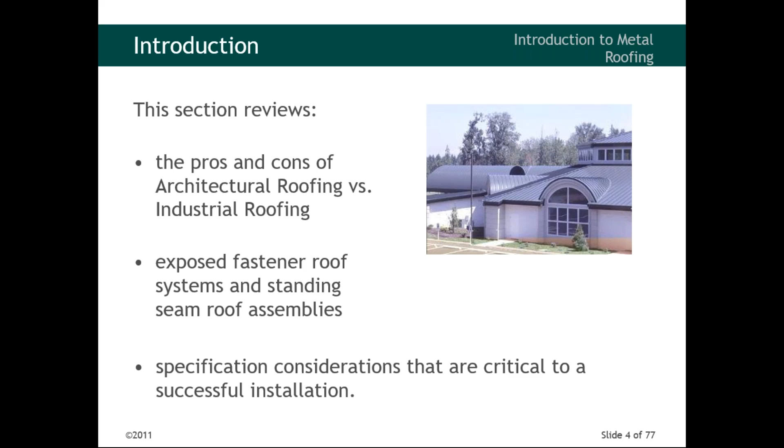Okay, this course is going to begin with a discussion of the pros and cons of architectural roofing versus industrial roofing. We're going to follow that with an overview of exposed fastener roof systems versus standing seam roof assemblies. Spec considerations that are critical to a successful installation will also be reviewed, such as proper substrate, underlayment material selection, metal gauge, coating, sealants, and so on. So let's start with the evaluation of the types of metal roofs.

Architectural systems. The 2 major applications for metal roofing are architectural and industrial. An architectural roof system is specified for performance, life cycle costs, as well as aesthetic reasons, and the roof is often part of the overall architectural design. Non-structural metal roofing usually requires a solid substrate beneath it, such as plywood, a metal roof deck, or rigid insulation over a solid substrate. A low-slope industrial roof system, on the other hand, is selected more for its function and performance, when cost is the major factor of the project, along with feasibility.

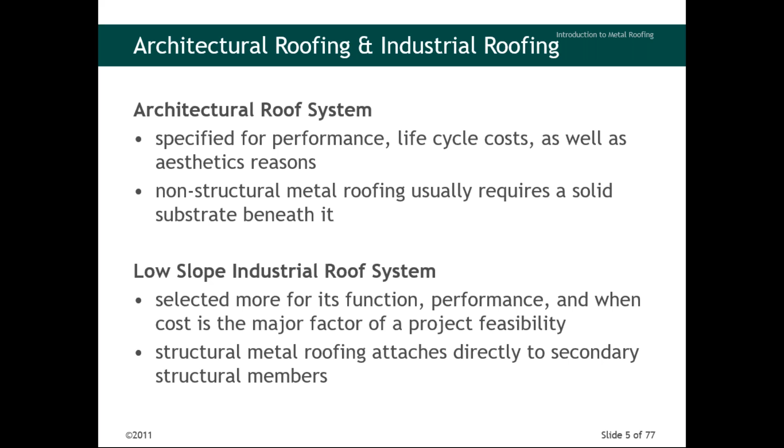Okay, exposed fastener roof systems. Exposed fastener panels, by definition, are number one, through fastened. They have fasteners that go through the metal. Number two, they're nestable. You can stack them one on top of another by moving the panel above to the left or to the right, and they can ship on pallets. And number three, they rely on laps and sealant for waterproofing.

Doesn't matter what the profile is. It can be a sine wave, trapezoid panel, a box, a diamond, a V, whatever you want. Corrugated is all of the above. Exposed fasteners, again, through fastened, nestable, and laps and sealant. These have been considered the standard in metal building for over 50 years. Exposed fastener systems, also known as through fastened, provide an economical performance value option.

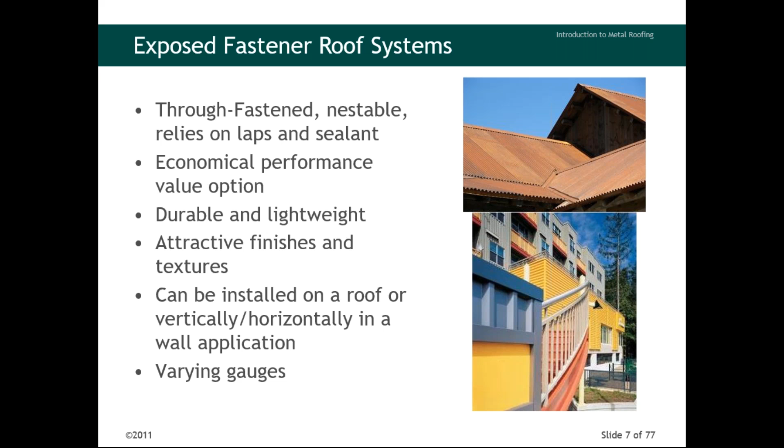They're durable, lightweight, available in any texture and color you can think of. They can be installed vertically, horizontally, used on roof, used on walls. These configurations can be fabbed in varying gauges that provide both high negative and positive load carrying capacities. Note that some types of these fastener profiles have been tested to provide diaphragm support.

So, along with the favorable attributes, exposed fastener roof systems have certain drawbacks. An exposed fastener panel relies on a visible fastening device for connection to the desired substrate and requires a field applied sealant to improve the weather tightness of the assembly. Also, these panels are pinned at every attachment point, thus not allowing for thermal cycling.

So I'm going to go off track on this a little bit. The good thing about corrugation is every single one of those corrugations acts as a tiny spring. If you take a piece of paper and you hold it flat on a piece of granite or a solid table, and you put your fingers at different points throughout either end and you push them together, that paper is going to flex at a different point every single time.

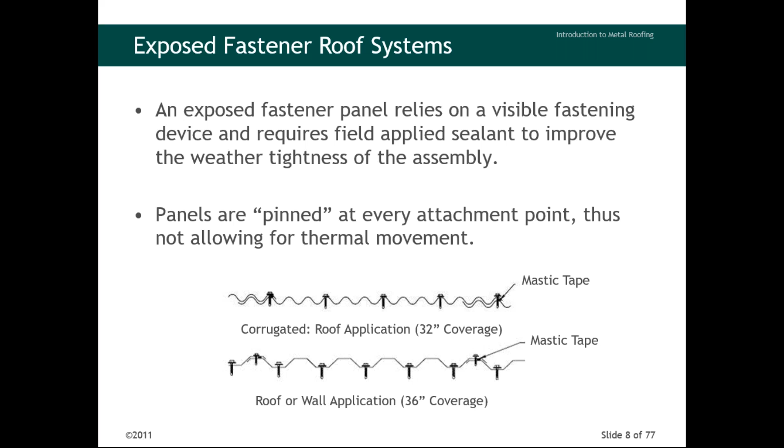Now, if you put a fold in that paper, it doesn't matter where you push on it, it's always going to flex on that fold. And that's what a corrugation is. It is a predefined point of flexation that helps to absorb that. Despite this, because they are through fastened, the top of the fastener head is going to catch a lot of the heat and it's going to transfer it down through, and over time you're going to get little holes or openings, which I believe takes us to this slide. There we go.

Over time, the expansion and contraction of the panels creates an elongated hole at the screw location. Again, it's a simple fix. Take out the existing and drive in the next size up: a 10, go to a 12, and so on. But just something to keep in mind. Typically, exposed fastener panels should only be used on shorter panel runs. Again, this is because of the thermal cycling. And they're not recommended for slopes less than 1 in 12.

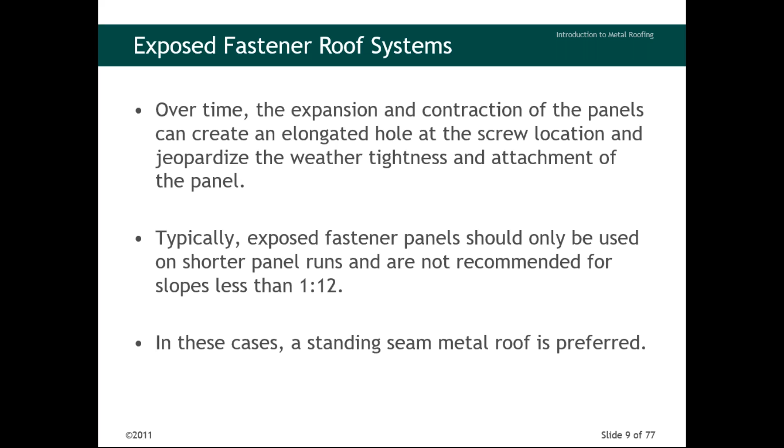If you're in certain states or you follow IBC, code requires that corrugated is only used down to a 1 in 12 slope over conditioned space when relying on laps and sealant. You have to have sealant in there. If there's no laps and sealant or there's no soldering, it's 3 in 12. So in these cases, a standing seam roof is preferred.

Okay, so what's a standing seam? Opposite of the through fastened, they are concealed fastener. So you may hear them called concealed fastener or standing seam, etc. They are also not nestable. If you have a 12-inch wide panel or a 16-inch wide panel, you can't fit another one inside. It's the same width. So these panels, when they ship, have to be flipped over upside down and stacked on top of one another with the flat sides facing opposite directions.

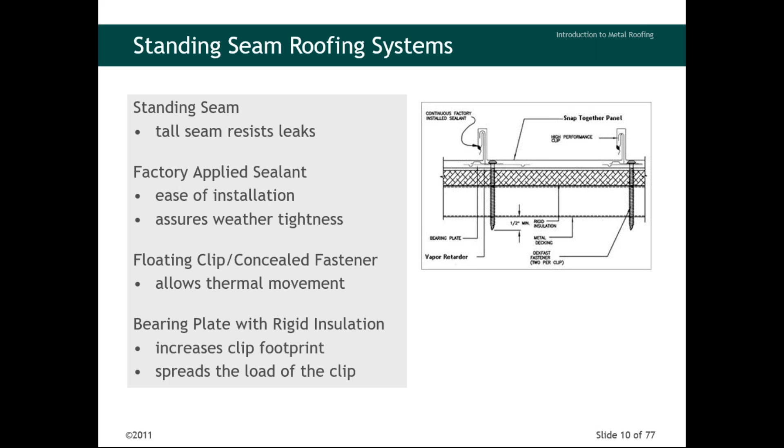Designed with a tall seam to resist leaks, standing seam offers performance coupled with aesthetics. The increased usage of metal panels on steep slope roofs is also coming into play, rather than just low slope roofs. But many architects prefer not to see the exposed screws attaching the panel to the substrate.

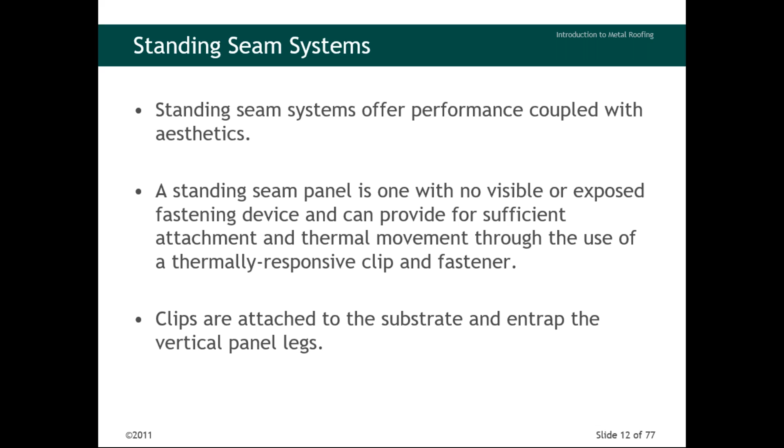So also, the standing seam panel is one where the fasteners are hidden, so they're not going to thermally cycle like exposed fastener panels will. The clip is attached to a substrate and entraps the vertical panel legs, and the concealed fastener eliminates the elongation of the fastener penetrations due to thermal movement, typically because the panel is moving within a clip.

There's one-piece and two-piece clips. One-piece clips are typically used with snap-together metal roofs in male-female configuration, and they entrap the steel leg, allowing unlimited thermal movement. Two-piece clips, however, are typically used with mechanically seamed roofs, except for a T-seam or a bulb seam.

With these, the actual clip is rolled into that panel leg, so floating clips are required with plus or minus 1 inch of thermal movement, which is going to limit the overall length. I'll get into that in a little bit, but keep in mind there's one-piece versus two-piece clips that can be utilized.

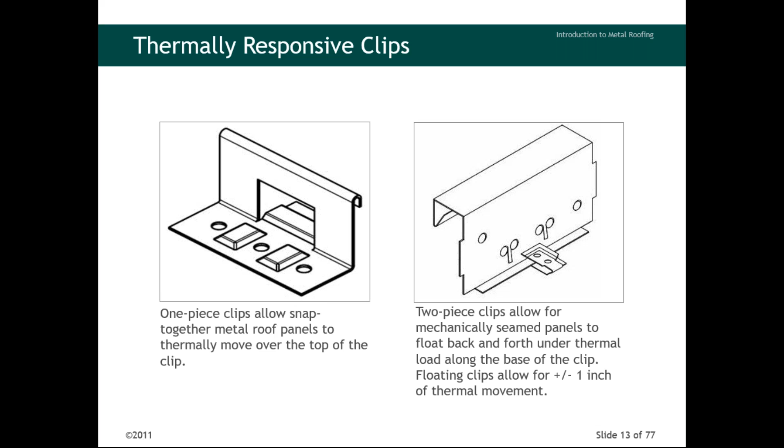So, bearing plates. Bearing plates are used when installing panels directly over rigid insulation to disperse the load of the clip from it compressing. Here's how you think about that: rigid insulation ain't so rigid, right?

If you're up there and you throw polyiso down, it has a compressive value of about 25 psi. That means if you step on it as a normal sized human being, you're going to put a dent in the ISO if you're not careful. So what do you need? Either an exterior board like a Densdeck Prime or USG Securock, or in lieu, you can use a bearing plate. In layman's terms, it's a big snowshoe, right?

The clip slides into that bearing plate, which is pre-perforated, and the fasteners run through both of them under tension. Instead of the clip's small footprint sinking into the insulation and the fasteners losing tension, the bearing plate distributes that load like a snowshoe, and you're good to go.

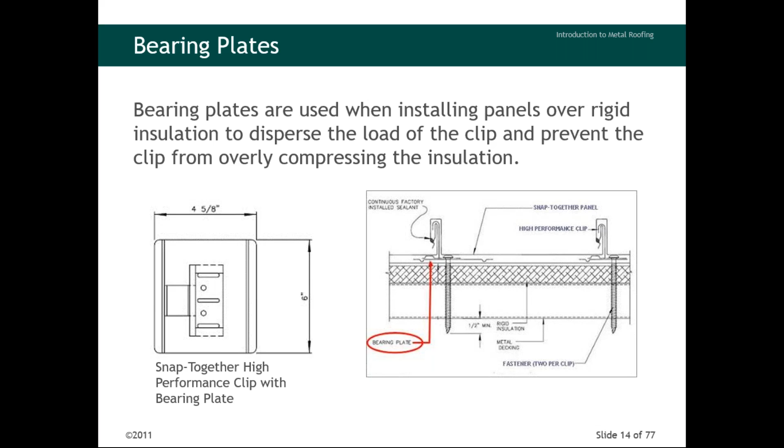Continuous standing seam panels can be used for long runs, low slopes, but it's important to be aware of the limitations. Continuous standing seam panels at extra long lengths perform no differently than a properly installed lapped panel. Extra long panels are prone to installation damage and present greater installation challenges.

So here's how I'd like to think about this. I know that everyone thinks a long length panel might be the best way to go because no laps means no holes, and it's going to be more strong and sturdy and waterproofed, right?

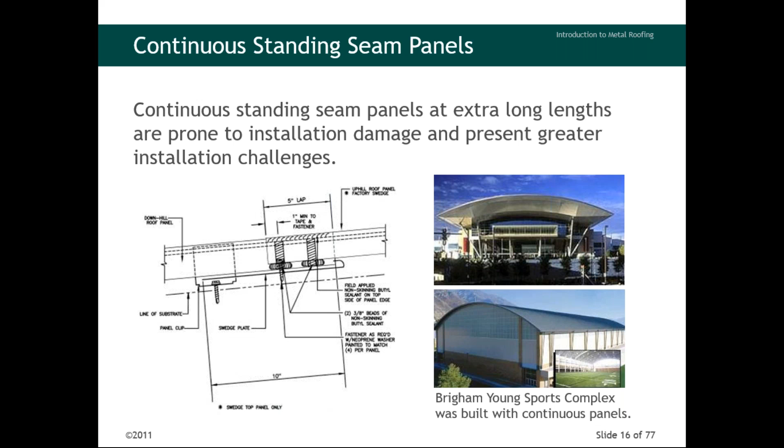Well, until you take into consideration the cost that entails. If continuous panels are required, you need to ensure you're using a quality supplier, because a lot of manufacturers don't offer mobile roll formers operated by factory techs instead of the contractor, which is going to invalidate your warranty, UL follow-up services, and machine certificates. So ask the metal manufacturer if that roll former is even certified.

The other thing to take into consideration is if you're going to use long length panels instead of a couple shorter ones, you're going to need certain things like crowd control, an on-site crane, and a spreader bar, which is incredibly expensive, plus one man or woman per 10-foot length of that panel.

So all of a sudden your crane rental and your spreader bar at 150 grand plus, paying 16 men or women to move a 150-foot long panel, might not be the best way to go when you can do three 50-foot lengths instead. Also make sure you don't twist the darn thing, which is why that spreader bar comes into play—because if you do, you're going to torque that panel and it's not going to be good, and the entire panel's wasted.

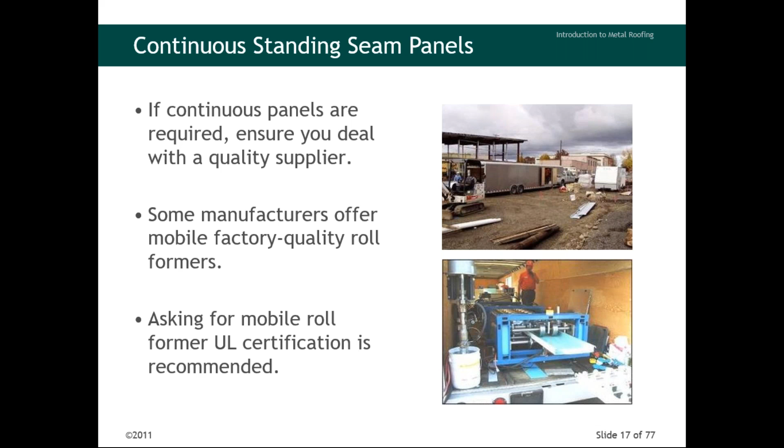So certain things to keep in mind there. Available in the market are also non-structural metal roofing panels, which are designed to shed water in sloped applications over solid substrates, as well as structural metal panels, which don't need them.

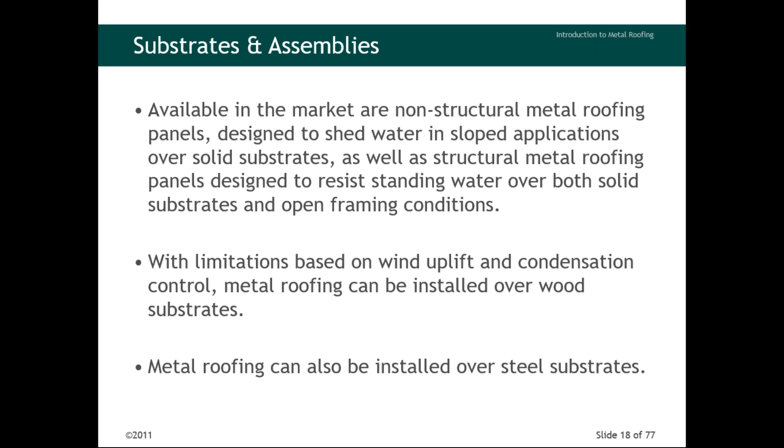With limitations based on wind uplift and condensation control, metal roofing can be installed over wood, such as solid decking, plywood, nail-based insulation, or SIPS panels. It can also be installed over steel substrates, including structural steel decking, both light gauge and structural secondary framing components, in both new construction and retrofits.

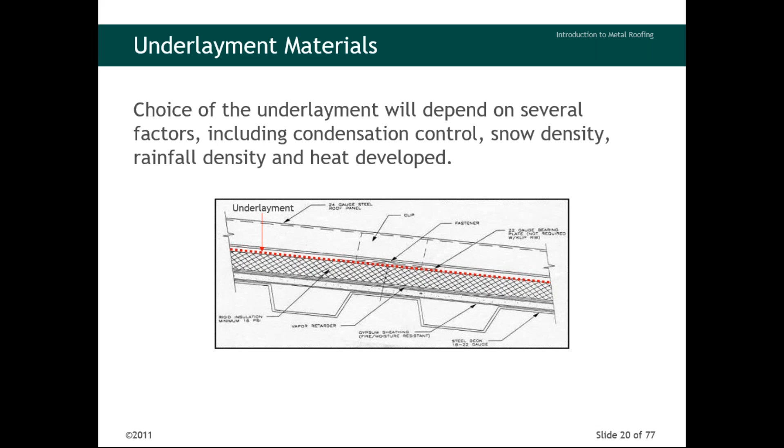Underlayment. You have a couple different options, including felt paper, synthetics, mod bits, and so on. Choice of underlayment is going to depend on a lot of factors. I do like using a 40 mil peel and stick modified that's also going to be high temp. The reason for high temp is under certain conditions, metal roofs can have extremely high temperatures under those metal panels, and asphalt impregnated paper can re-emulsify and leak down the sides of your building. So that's not a good look.

Vapor retarders, we can get into this. This is very, very specific. Generally designed to be installed on the warm side of the insulation or directly underneath the metal panel. Again, 40 mil peel and stick is my favorite way to go. If you have questions in regards to this, feel free to reach out to me for your site specific and project specific conditions.

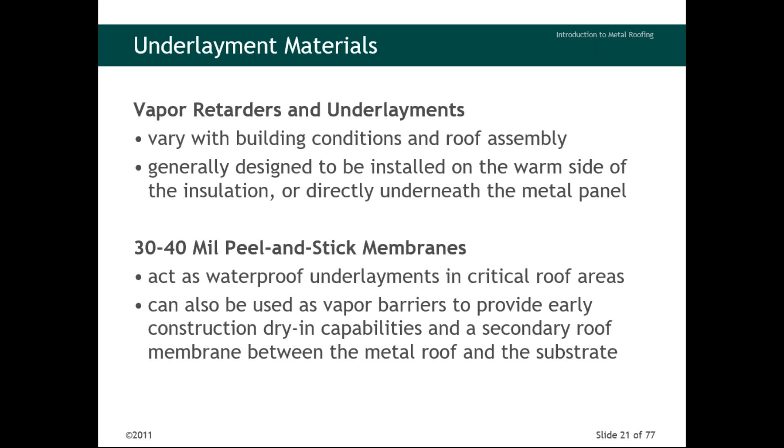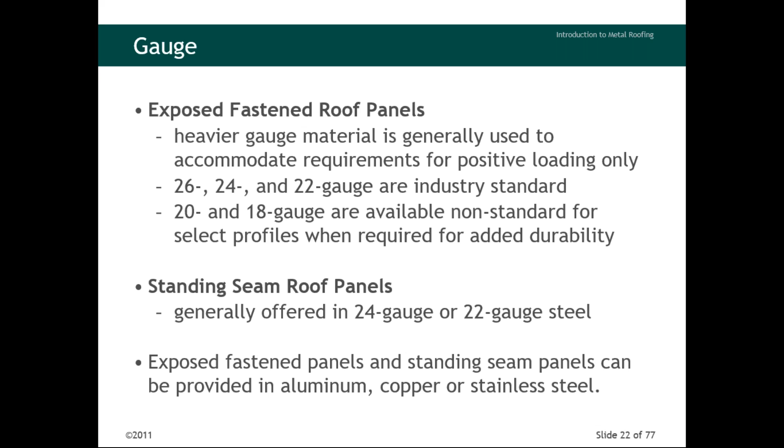On the other hand, standing seam is generally 22 or 24, and we can sometimes go to 20 for certain projects. Although test data is sometimes limited, both exposed fastener and standing seam can be provided in aluminum, copper, stainless, or whatever metal you need to meet the specific design conditions. But again, test data may be more limited.

Any questions so far? Thanks very much. Yeah, we do have a couple of questions, and a couple of people are asking about the limitations on slope for these various roof systems. In other words, how low can you go? I think, for batten seam, for standing seam, are there limitations?

What are they? Yes, so let's address that real quick. Let's first start with exposed fastener panels. Exposed fastener panels under IBC are limited to 3 and 12 without a sealant within the lap. They're limited to 1 and 12 over conditioned space with sealant in that lap. Anything below that is you're on your own, and that's typically used over non-conditioned space.

In terms of standing seam, the traditional batten style panels are, if you made an L with each of your thumbs and your pointer fingers and you held them on either side, that's what the panel looks like, right? It's just two 90-degree bends that have that batten seam. Those are typically limited to a 3/12 slope.

A male-female interlocking panel, snap lock style, is limited either, depending on manufacturer, to 1 and 12 slope or to 2 and 12 slope. Again, this is manufacturer dependent. A mechanically seamed panel is generally, again manufacturer dependent, limited to a 1/4 12 slope. Anything below 1/4 12 slope under IBC is required to be coal tar pitch. If you want to get involved with that, we can have a discussion after the fact, I've got info on it. But mechanically seamed, 1/4 12; snap lock, 1 and 12 or 2 and 12; batten style, 3 and 12.

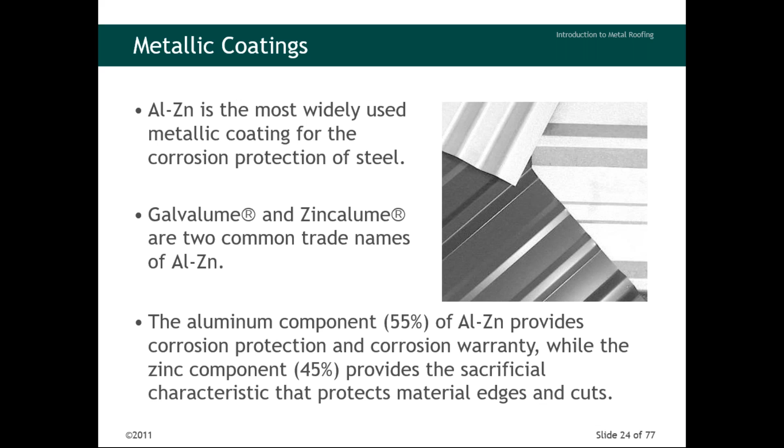So it's a 55-45 aluminum to zinc by weight, okay, by weight. Again, trade names, Galvalume, Zincalume. If you hear that, that's what it's after. The aluminum component of the Zincalume provides the corrosion protection to the steel sheet along with the corrosion warranty, while the zinc component provides the sacrificial characteristic that protects the material edges and cuts. So oftentimes when we're talking about bare metal, we're talking about aluminum zinc coated metal, okay?

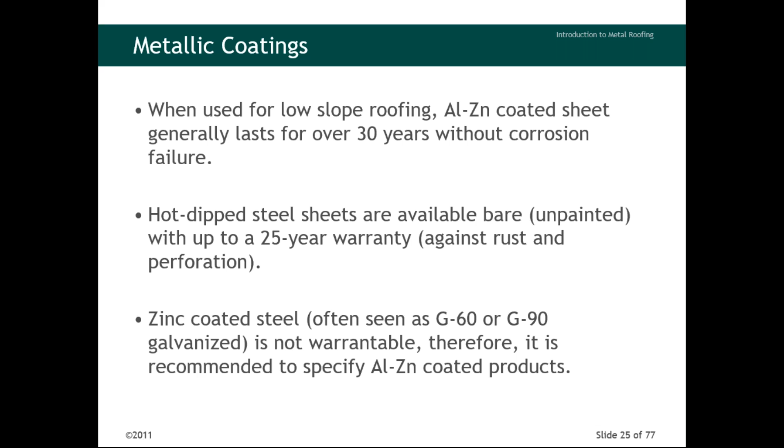So there's also zinc coated steel, which you often see as G90 or G60. Well, that's your galvanized, okay? Galvanized is not the same thing as Zincalume Galvalume. It's not warrantable, therefore don't run with it unless you have to, okay? Galvanized substrates are not warrantable. Zincalume is. Paint options for metal roofs, okay.

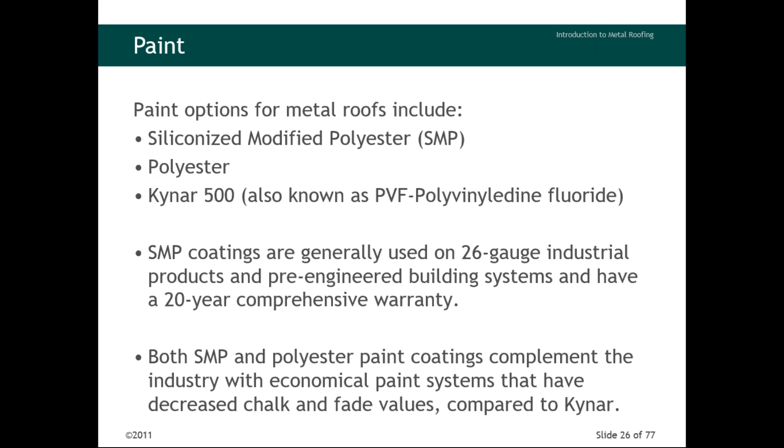Okay, so let's say you don't want those two. Let's go to Kynar. Kynar 500, Hylar 5000, I mean all the same thing, okay? Most widely used in the architectural market, it's a paint system containing a minimum 70% fluoropolymer or Kynar resin. Chalk and fade qualities outperform polyester powder, urethane, silicones, acrylics, hands down.

Kynar paints — this slide is actually out of date now — may be warranted for up to 40 years, not 30. So when you couple Kynar with a Zincalume Galvalume substrate, the product is going to have exceptional color stability, chalk resistance, durability, abrasion resistance, and a substrate warranty. So even for severe corrosive environments where you'd say, hey, I should use aluminum, well, maybe not. I'll get into the differences of steel and aluminum a little bit later.

But with steel, you can use an industry standard 1 mil Kynar based coating. You can do a high build primer or a top coat. So you can warranty a steel coated substrate with Zincalume Galvalume with a paint system over salt water for 20 years.

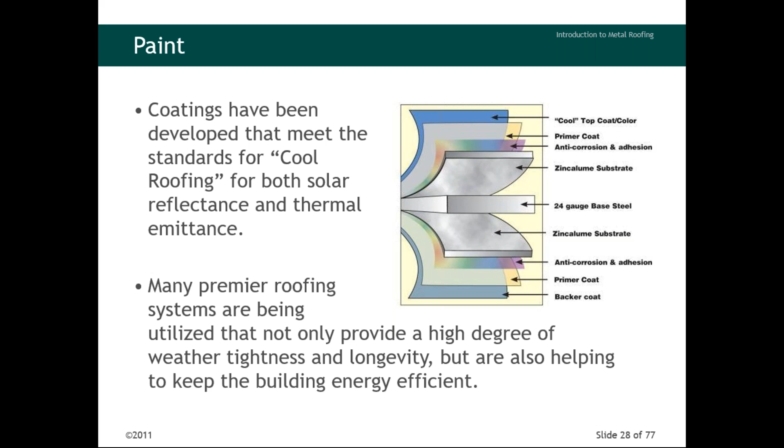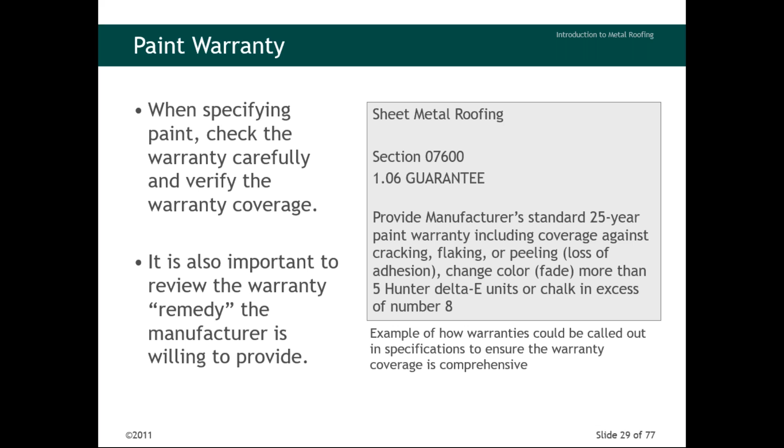Okay, I'm going to blow through these pretty quickly. If you have questions or concerns on warranties, reach out. There's way too much info here. No warranty is the same - they're very complex and convoluted. Make sure you check the warranty language though. It's critical to examine and compare not just the length of the warranty, but what it covers comprehensively: adhesion to the steel, color, fade, chalk, oxidation, what's the remedy, is there a reset clause, and all kinds of stuff. Reach out to me on that.

Sealants - here's the sealant question. Sealants protect against moisture intrusion on the roof at the exposed panel flashing edges or lap conditions. There's a couple different sealants used, okay?

Non-curing butyl is typically tube applied. This type of sealant should be used in any areas on a metal roof that are subject to dynamic movement of the panel, i.e. a lap, including panel side laps, end laps, flashing attachments, and any other metal-to-metal connection. Not only does non-curing sealant protect against capillary action, it allows the panels and flashings to react thermally, expand and contract without compromising the integrity of the sealant. It's not going to dry out, break down, or get decayed or destroyed, provided it's not exposed to sunlight.

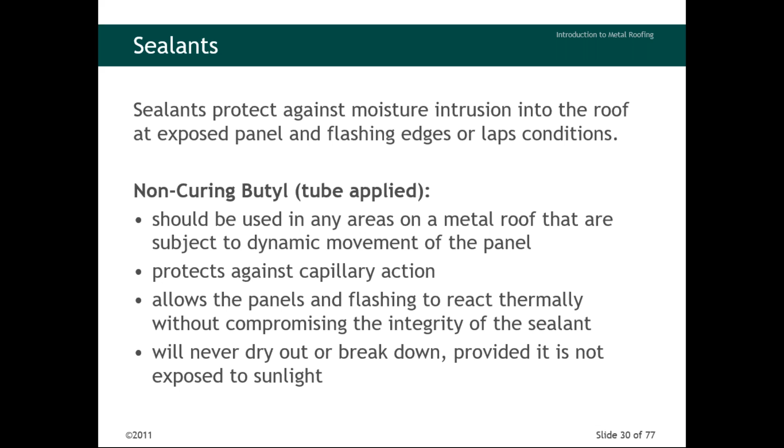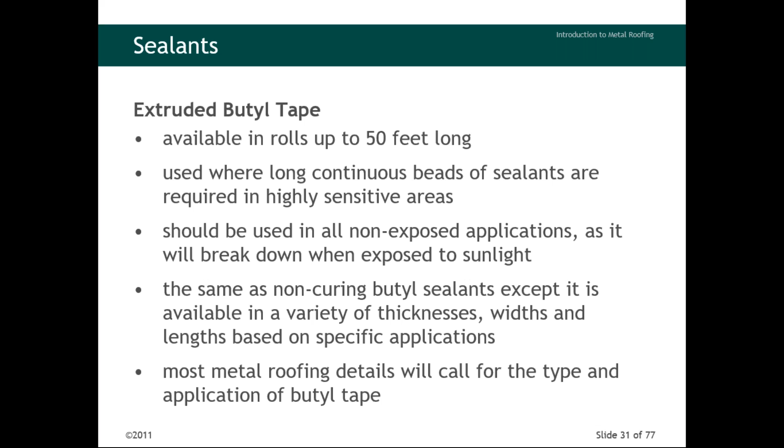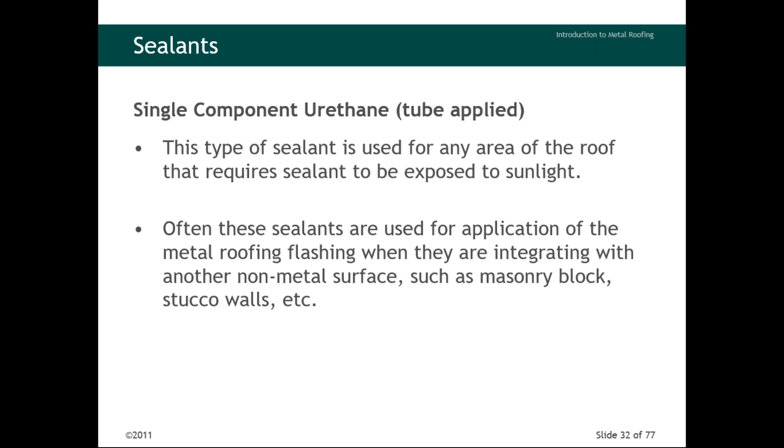Single component urethanes, tube applied, for any area of the roof that's exposed to sun. These are also used for metal connections to non-metal connections like masonry blocks, stucco walls, wood, and so on. They come in colors too.

Specifying for metal roof solutions. Let's review the specification considerations that help facilitate successful installation. Material quality and source - testing. As a quality manufacturer can provide test data, I'll throw that out there. Wind uplift, ASTM E1592, and air and water infiltration, 1680, 1646.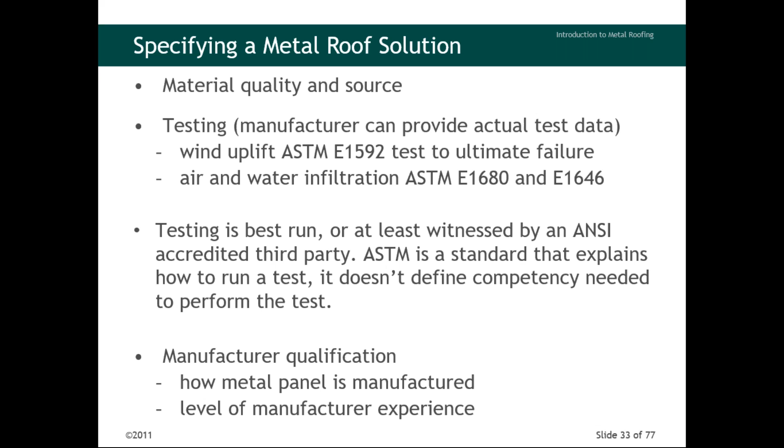Manufacturer qualifications - how's the metal manufactured, what's the level of their experience, are they certified? We can go down a rabbit hole with this, so if you have questions, in the interest of time, reach out to me later and I can walk you through it. There's also the installer side.

Make sure you have a qualified installer with a level of experience. They're manufacturer approved and trained, and they've done a certain amount of installations within a certain distance of where your project's located, and they can bond this type of project, because you don't want two guys in a truck that do painting one week, cabinets the next, to install your metal roof.

Okay, verify all the submittals. Again, we're going to cross over this quickly because it's pretty self-explanatory - the gauge, the testing, and so on, and then require stamped calcs for your project-specific conditions.

So, energy content - this also changes, but let's explore real quickly for metal roofing: solar panels, environmental impact, and so on. To that end, various software programs are available to use, such as ISO 14K environmental standards, Athena Eco Calculator, and so on. But it's important to compare not only the life cycle sustainability of a product, but also its full range of environmental and social impact in order to choose the best solution.

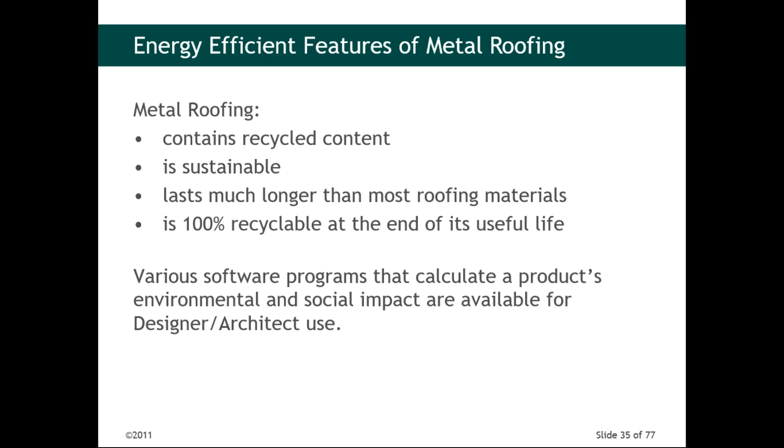Again, this is a rabbit hole we can go down, if you're following LEED, or if you want to go on the different petals and so on. I've got information on all of that - reach out to me if you're interested, from LEED to Living Building and so on.

Coatings - that can be an entire presentation on its own. Some coatings and finishes available today qualify as a quote-unquote cool roof product. What a cool roof product is: they have infrared pigments incorporated into the paint, so they put magical little sprinkles into the paint that give it a higher reflectivity value, even in darker colors. So where you see a cool dark bronze or a cool matte black, that's what it's referring to.

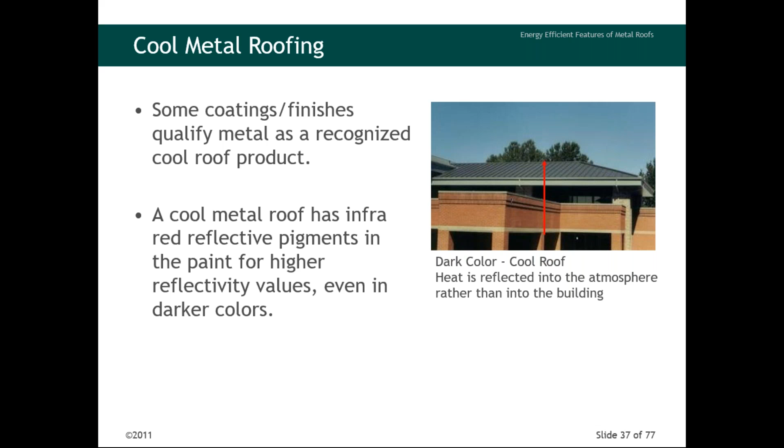For instance, a roof with normal pigments may have like a .07 reflective value, but improving it to a .32 with their pigments. So cool metal roofing has high solar reflectance values and emissivity values exceeding 80%. A cool metal roof will reflect the solar heat back into the atmosphere, lowering both the inside temps of the building and the surrounding environment, thereby reducing the heat island effect, also the intake temps of HVAC.

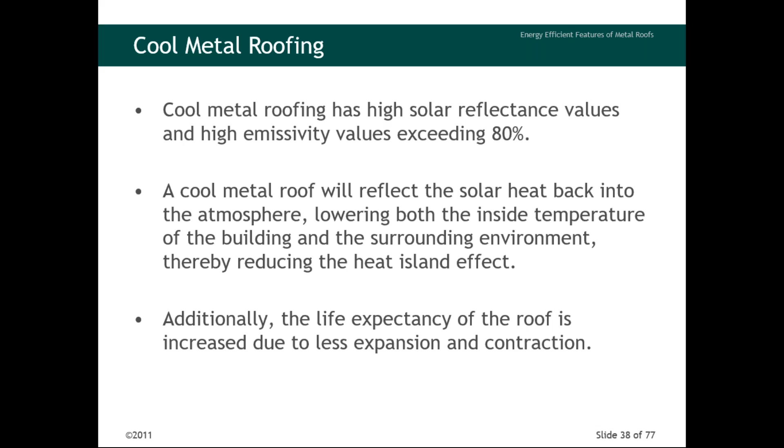Additionally, the life expectancy of the roof is increased with less thermal cycling. Here's a couple of colors and how to look at SRI and thermal emittance. Again, reach out if you need some help.

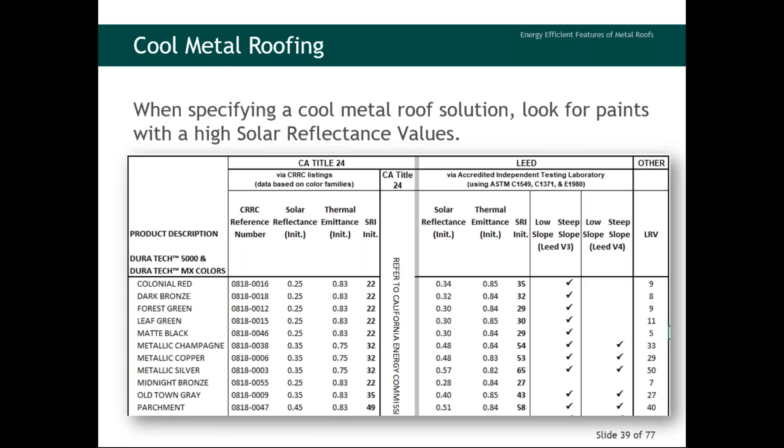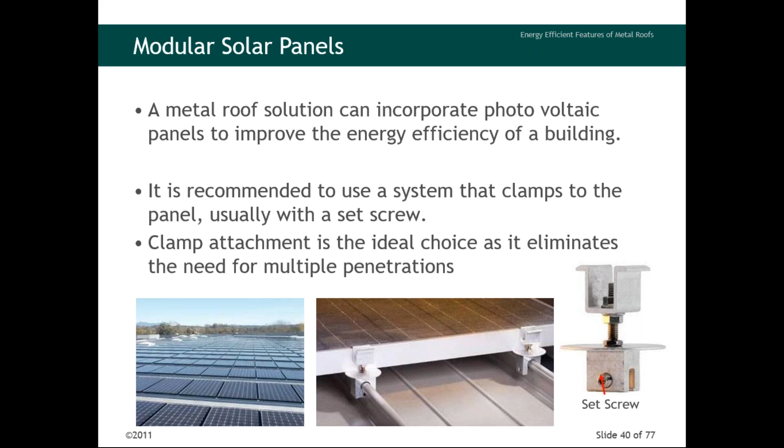Modular solar. A metal roof solution can incorporate PV, no problem. I prefer these manufacturers, though I can't mention names. Reach out to me if you want some help on this. Certain manufacturers make clamps that attach onto the standing seam without putting any holes in the roof. You tighten it down, then put the PV on top. So it looks like this: set those clamps in place, lay your subframe, and put the PV on top.

Self-explanatory: keep the dissimilar metals apart. Clamp-on systems won't void a warranty, but you should note that damage from them isn't covered by any manufacturer I know of. So follow the torque considerations very carefully.

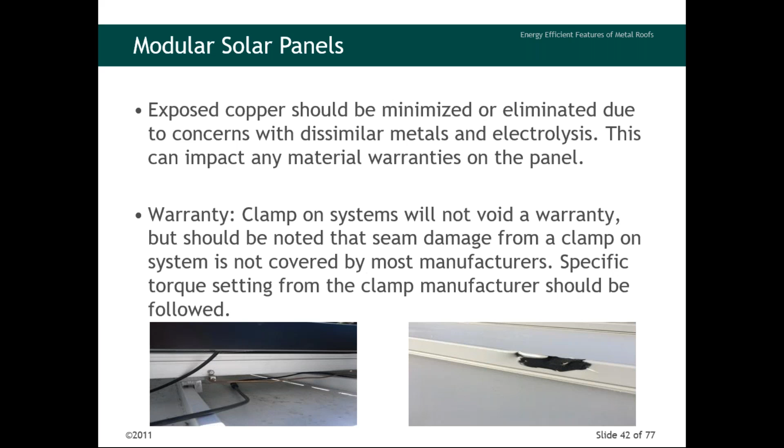And that's what it looks like there. We're at another spot. Hey, thanks, Jeffrey.

We've got a lot of questions here about fasteners and especially exposed fasteners, let me try to pull them all into one big question. Are there any particular screw materials for exposed fasteners, and are there issues with galvanic action around the screws, such as with other materials like wood or pressure treated wood? And are there any issues with a through fastener mitigating holes that could open up due to movement as a result of that?

Okay, so exposed fastener roofs, I have to be careful how I handle this one because it's going to vary widely from manufacturer to manufacturer. Whichever manufacturer you're specifying, I would follow their fastener recommendation to the T, because that's what all your IAPMO, ICC, and ER reports are going to come back with. All their testing and values are done with a specific fastener, so I would use that as my point of reference, and it could be different across the board.

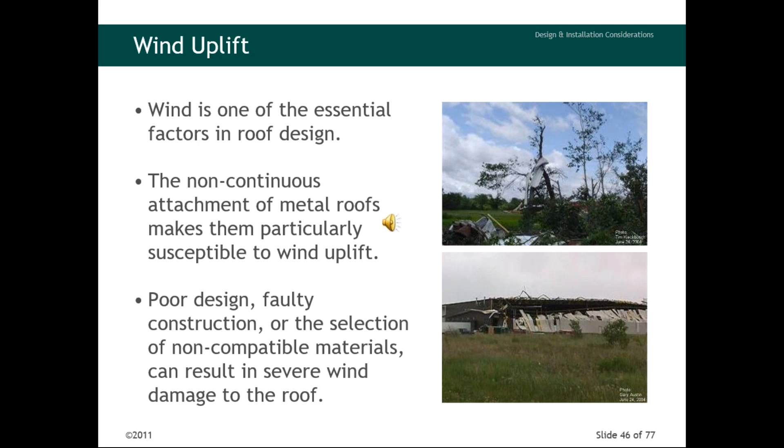Wind is one of the essential design factors in roof. The non-continuous attachment of metal roofs makes them particularly susceptible to wind uplift, defined as the upward force exerted by wind traveling across a roof, right? Bad things can happen if not done correctly. So listed on this slide are some key factors. In the interest of time, I'm going to move through them. I'm sure you're familiar with these. We can provide on-site calcs for these when you provide this information.

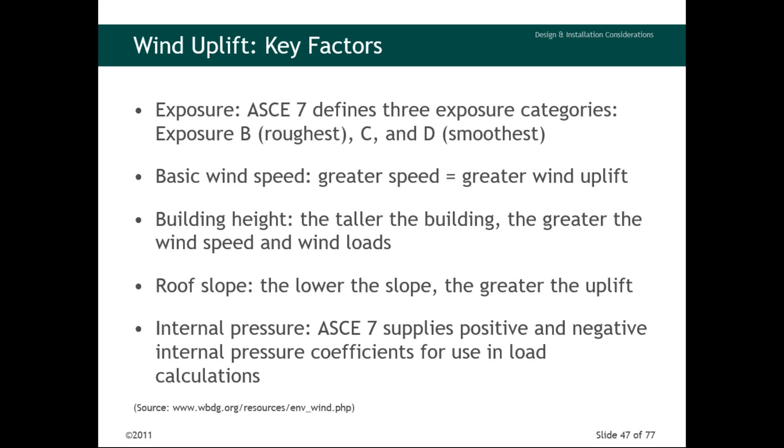Exposure, exposure B, C, D, so on. The smoother the terrain, the greater the wind load. Basic wind speed, building height, roof slope, internal pressure, they all come into play. Okay. Structural standing seam panels are tested under ASTM E1592. That is the standard test method for structural performance of sheet metal roof and siding systems by uniform static air pressure difference. I was getting it right though.

All standing seam metal roof panels should be tested under the UL 580 uplift test as well to meet minimum requirements in the industry. Additionally, the manufacturer should subscribe to the UL follow-up service because projects often require more stringent test results. Many standing seam panel manufacturers test their metal panels with other agencies other than UL, such as ASTM and FM. Okay, got to pay attention to this one. Ready?

UL is pass-fail. Okay, did you pass? Did you fail? ASTM and FM testing takes that panel to failure. All right. So just because you got a 71% and your pass fail rate was a 70 doesn't mean it's the best panel around. ASTM, you know, takes that to failure. So maybe your grade was a 71 on that test and you passed, but you aren't that kid that got the 98, right?

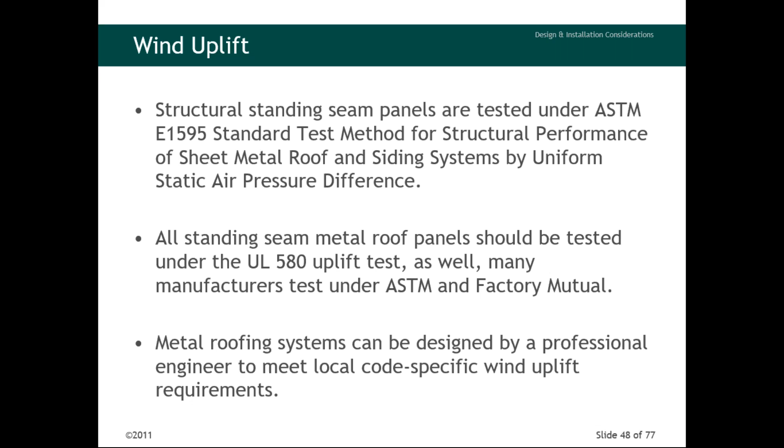So taking it to a failure point provides important data to develop accurate negative pressure information useful for determining the panel performance and clip spacing. That's where your ER reports come in. Your ICC and your IAPMO and so on, right? So pay attention to that.

All right, air and water infiltration. In addition to wind, test for air and water infiltration. That's your ASTM E1680 for air and your 1646 for water. With proper sealant placement, exposed fastener panels can also provide adequate air and water infiltration control. And in addition, the standing seam roof panels that require mechanical seaming in the field and also require a panel-to-panel end lap due to a long

length. Remember my example of 3 50-footers with 6 people and no crane, no control, and not having to monitor wind conditions for wind that might spin a 150-foot long panel versus a long length panel. Again, there's pros and cons to both. Maybe you want a whole length, but maybe you don't.

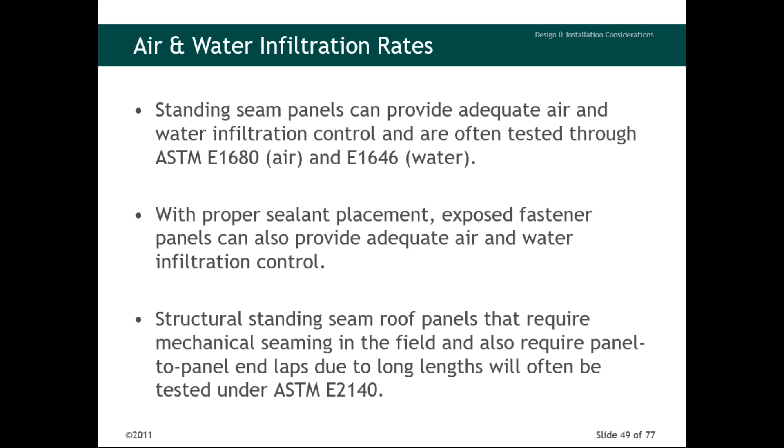The panel end lap test is tested under the ASTM 2140 as well. So that's where the panel-to-panel end lap is flooded with 6 inches of water, standing water, and then it has to hold for a period of 6 hours under pressure with no signs of leakage. So these tests are quite comprehensive. We're going to blow through this pretty quick.

Again, keep in mind that UL reports do not hold the same value as ASTM. UL doesn't push to failure, it's pass-fail, while ASTM does push to failure. And the ASTM tests are generally what's put in the ER, independent third parties, compared to UL. So in terms of FM as well, talk to me offline. If you want an FM roof, you should have FM requirements in the insurance. Okay.

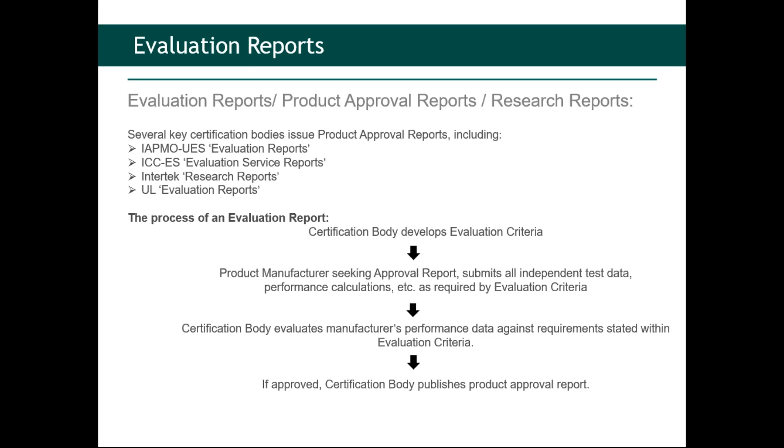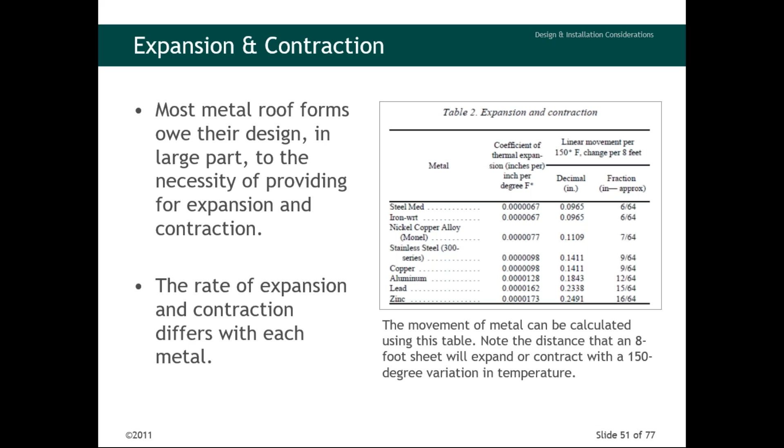This is what some of these reports look like. Thermal expansion and contraction with changes in temperature have to be taken into account as well. The buckling of sheets, tearing at the seams, loosening or pulling through the fasteners are common failures. So the rate of expansion and contraction is going to differ with each metal, per the table to the right. I believe this one's actually out of order. It should have been after this. Anyway, different metals move different ways, right?

Okay, evaluation reports and approval reports look like this. It's going to give you a table to extrapolate everything out. You're going to have your gauge at the top. So if you look at the one on the right, you're going to say outward negative uniform load capacities of 22 and 24 gauge of whatever product. You're going to go over to your left under the substrate. You're going to find what you're going into.

Are you going into metal? Are you going into wood or whatever, right? And then you go one to the right. What gauge of metal are you going into? And then you take your site-specific wind load requirements and you cross-reference that with the table, and you get what spacing you need.

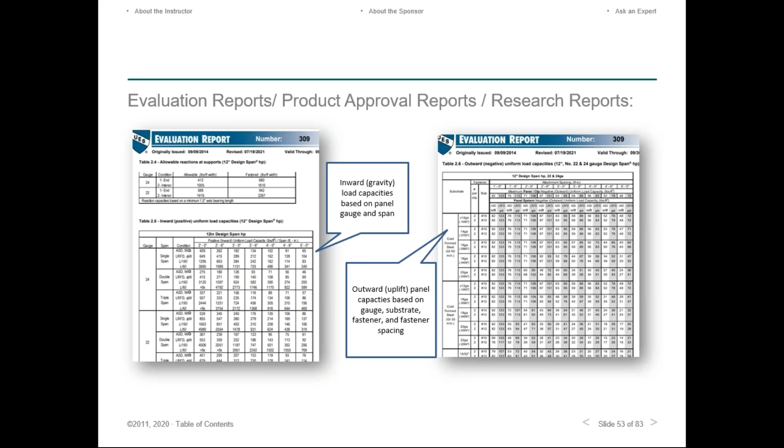All right, details. There are 3 ways to accommodate for thermal movement: 1 at the low end of the panel, 2 at the high end, or 3, both. Low, high, or both. Typically, panels are pinned at the high end or upslope of the panel. To accommodate movement at the low end of the panel, the high end is pinned and fastened, and the low end is a floating eave, right? It can then expand and contract downslope.

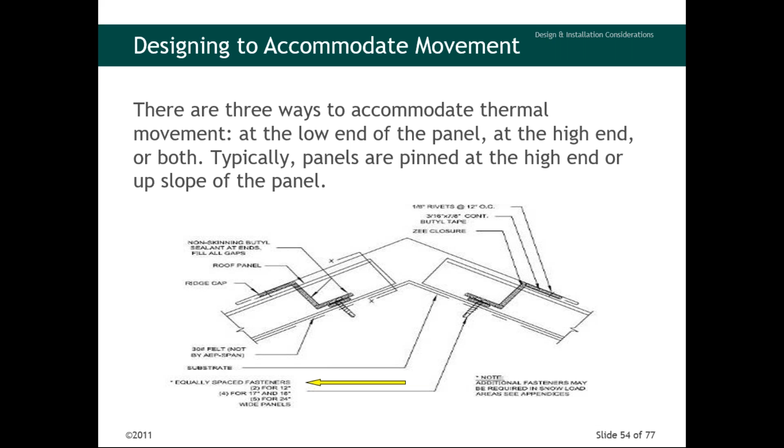To accommodate movement at the high end of the panel, the low end is pinned at the structure, so conversely, and the high end floats to accommodate the thermal movement. This method requires exposed fasteners at the low end of the panel. They may be of aesthetic concern.

The third method is to allow expansion and contraction at both the high and the low ends of the panel. This requires pinning somewhere in the middle of the panel for drag load, usually at a lap. This is generally done on long panel runs, i.e. where you have 70 foot plus in either direction, upslope and downslope, for 140, 150 foot long panels plus. This is done where the expansion and contraction is so great that it makes it difficult to allow for it to adjust at just one end, which reminds me why I put that slide there actually.

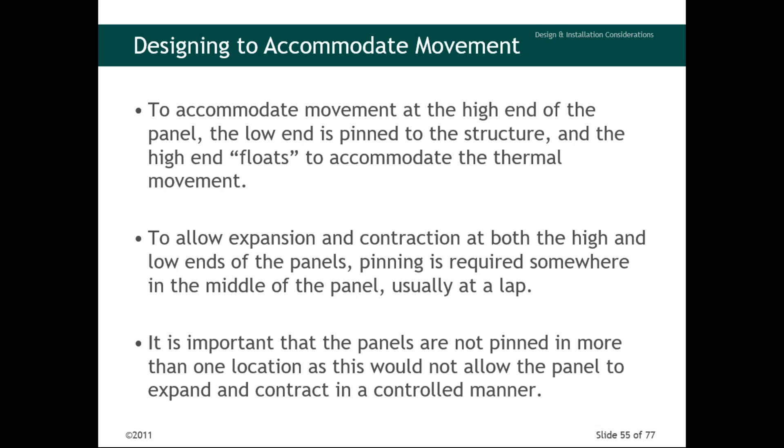So steel's going to move around 1/8 of an inch over a 10-foot stick, where aluminum's going to move 1/4 of an inch over a 10-foot stick. So when you have these long panel runs, your panels may be moving inches each day, right, as they thermally cycle. So that's where that movement in that clip of plus or minus 1 inch is going to come in on that 2-piece clip. So they can expand downslope 1 inch and upslope 1 inch, and you can hit those long lengths.

So an example here, you have a roof. I don't care if it's a shed roof or it's got a ridge, right? Going to pin it up top. It's going to expand downslope at 75 feet. But wait, Jeff, I've got a huge shed and I need 150 foot length. I don't want to pay for a spreader bar. I don't want to pay for on-site roll forming because the truck can't bring in 150 foot panels.

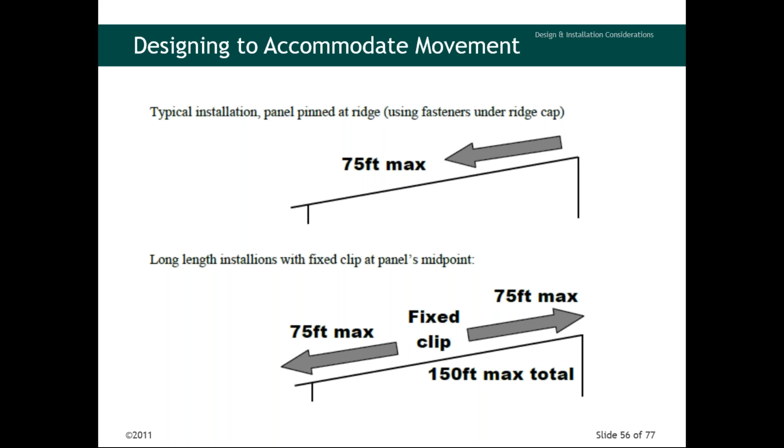I don't want to pay for 1 guy per 10-foot stick. I don't want to have crowd control and a forklift on site and all the other stuff. And I don't want to have the worries of the panel twisting while I'm loading onto the roof. So I'm going to do 2 75-foot long panels. Okay, you put a fixed clip in the middle. One panel expands upslope, one panel expands downslope, because again, metal has to move.

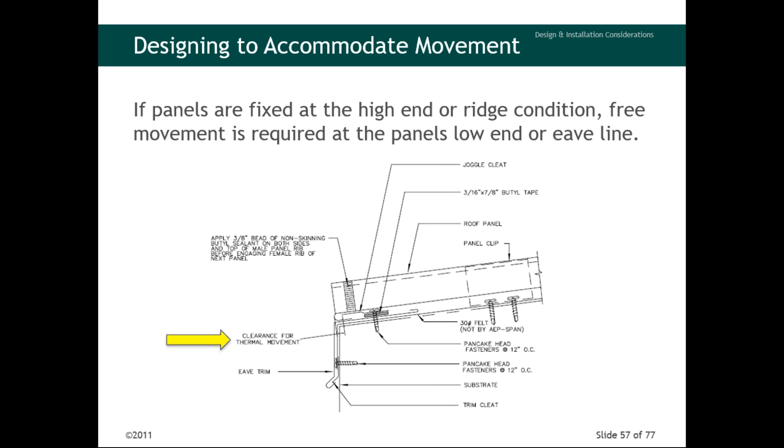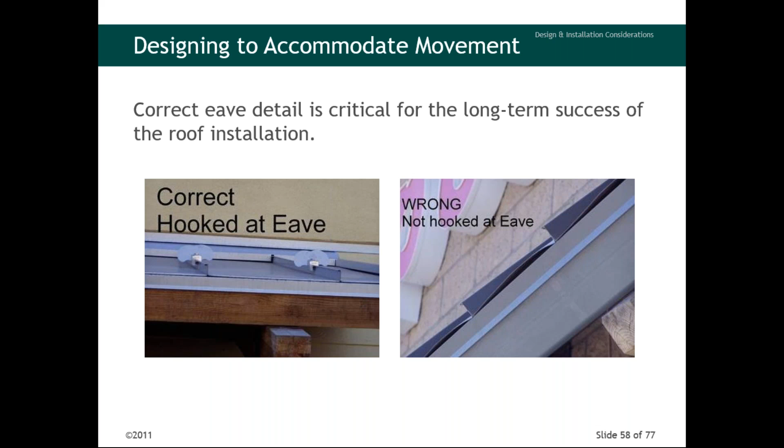If panels are fixed at the high end or the ridge condition, free movement is required at the bottom. There's your joggle cleat for a floating eave. Pictured here are examples of a proper and improper eave detail. The correct detail is critical for long-term success of that roofing installation.

Okay, a knee joint. Say you want to be modern and you want to turn a panel from a roof down a wall, right? Not a problem. However, it creates a point of fixation. So when you turn that panel and you cut the ribs to turn it down, 90 or 45, whatever you're doing, that creates a point of fixation. By definition, the panel now has to expand upslope. It's pinned at the eave.

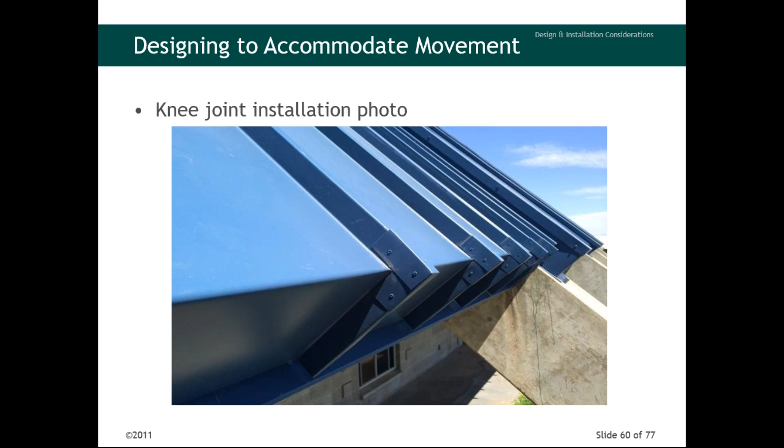There's your knee joints or your kneecaps. This is what covers the vertical panel rib of a standing seam roofing panel that transitions onto the fascia.

What's this one for? Oh, don't use it in snow. Okay, reach out to me if you want to use it in snowy climates. The freeze-thaw effect can pop these things wide open. Snow shear can shear them straight off. So you have to be aware of how much thermal movement is going to occur.

How far down the wall does this panel go? Number one, and where are you located? Number two is going to come into play. But this is an image of a failed kneecap in snow country.

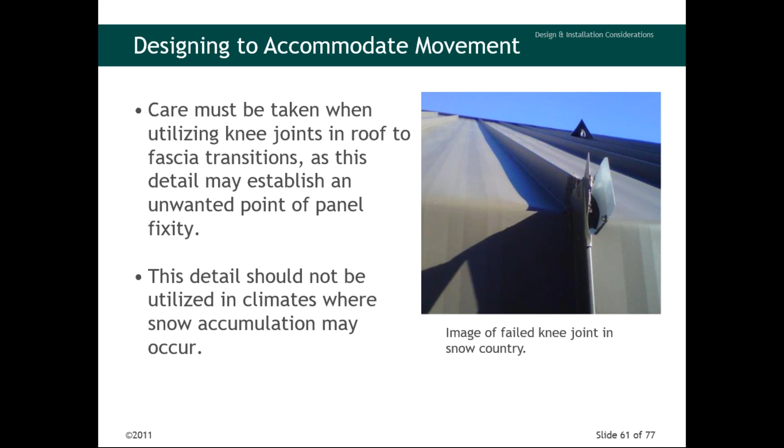Okay, you're expanding upslope. How do you do the ridge or the high eave? Okay, high eave is on a shed roof. Your ridge condition is on your standard ridged structure. So the drag fasteners are not going to penetrate the substrate. They're going to penetrate that Z.

The ridge cap is going to have a step in it. So the panel end support is required for the secure connection to the Z closure of the panel. And the ridge is installed again with a step which acts as a hinge point to allow the cap to flex when the panels expand and contract.

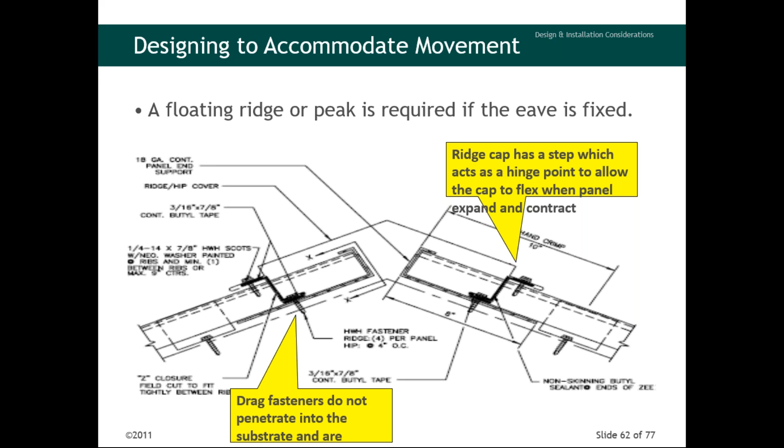There's your floating ridge. For longer roof runs, a fixed panel in the midpoint may be required. This again requires both the high and low side to float. Generally on long panel runs where the expansion and contraction is so great that it makes it difficult to allow for it at one end, or the thermal movement exceeds the capacity of the clip, or on like a barrel roof, right? You pin it at the top and it goes down either side.

So in these instances, the overlap between the hidden cleat and the turned under end of the panel at the eave may need to be increased to accommodate for thermal movement. It's important that these panels are not pinned in more than one location. If you fix it more than once, the panel can't move. It's going to pop and make horrendous noises when it gets heated up.

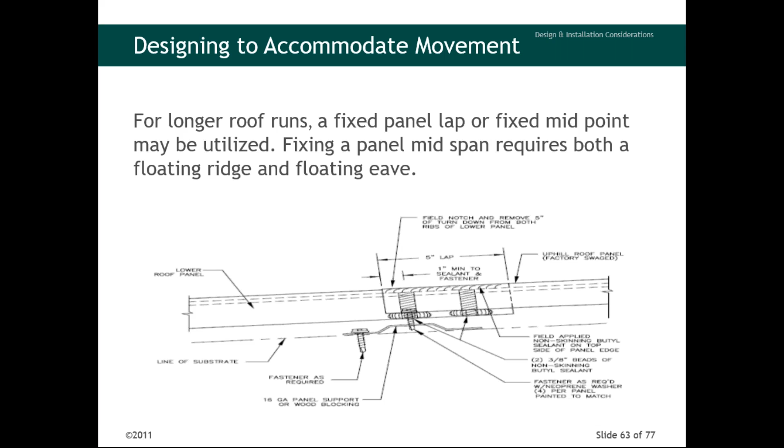If you have an outdoor patio cover that's even aluminum, you may have heard that. It'll go boom when it gets hot and the metal moves. If you're on the inside of a metal building, it's going to sound like a bomb's going off, and it's going to oil can that panel to no end. It needs to be able to thermally cycle. So stagger your panel laps.

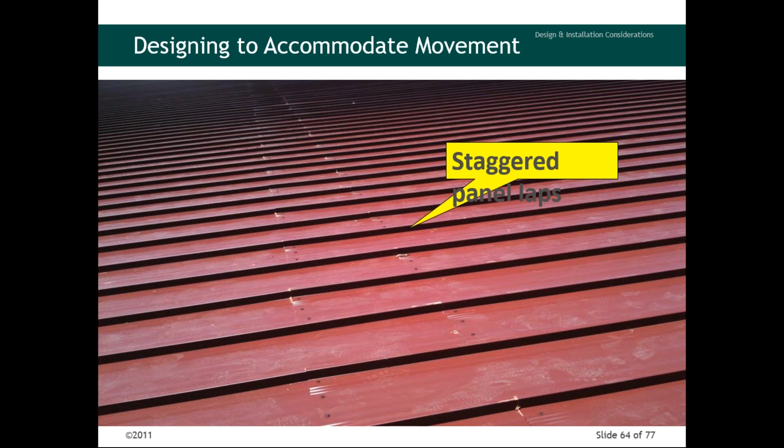Again, there are some exceptions to this rule where you have batten panels like a T-seam or a bulb seam, but generally speaking, the cost of the spreader bar, the crane rental, the on-site crowd control, blocking of the area, no wind, are going to outweigh that.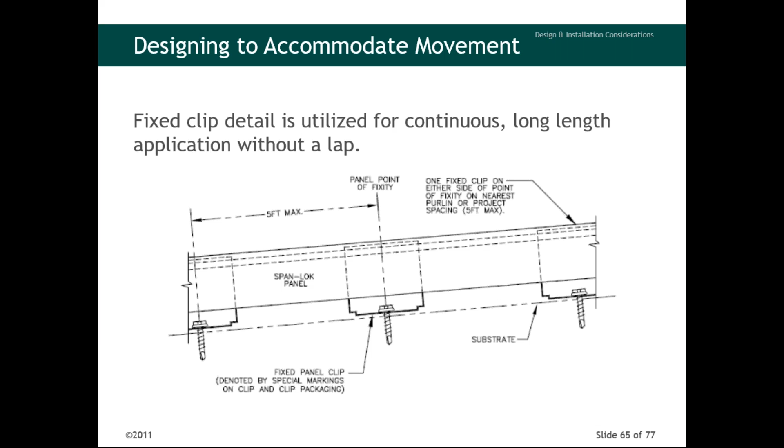Fixed clips operate on the same principle as a fixed lap. They will both require the high and low ends of the panel to float. Fixed clips, again, are most commonly found on long length panel applications or for fixing the apex of a barrel roof. This is what a fixed clip looks like before it's seamed. Fixed in the middle, floating on the top, right? Expand upslope and downslope. Notice the lap.

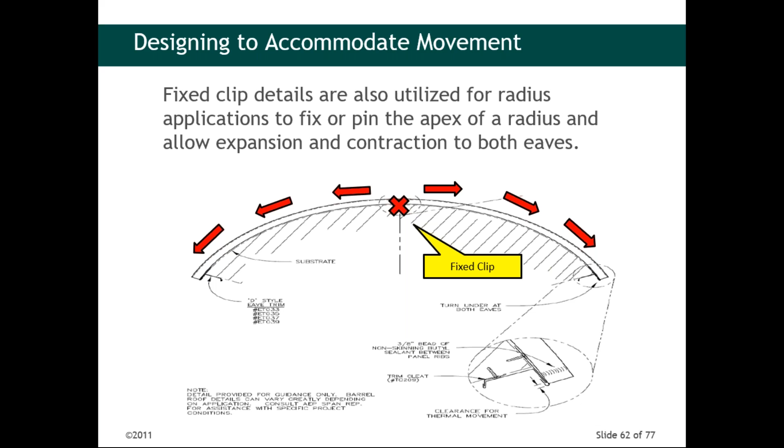All right, barrel roofs. Radius applications require the apex to be fixed or pinned. Panels cannot fully expand or contract around the radius due to the curve. So if a panel floats around the radius without a point of fixity at the apex, oil canning or a deflected appearance in the panels can take place. Fixed in the middle, floating everywhere else.

Okay, what's this one?

Varying panel width and thermal movement should also be considered when dealing with full-length roof panels at the gable ends of the building. In most cases, installers will not be able to utilize a full panel width at these ends, so this detail allows for cutting the panel to the necessary field-verified width and bending the panel edge up an inch and a half or two inches, whatever your panel height is. The panel turn up protects against infiltration of wind-driven particulate. Once turned up, the panel edge is inserted into a receiver trim and secured against wind uplift.

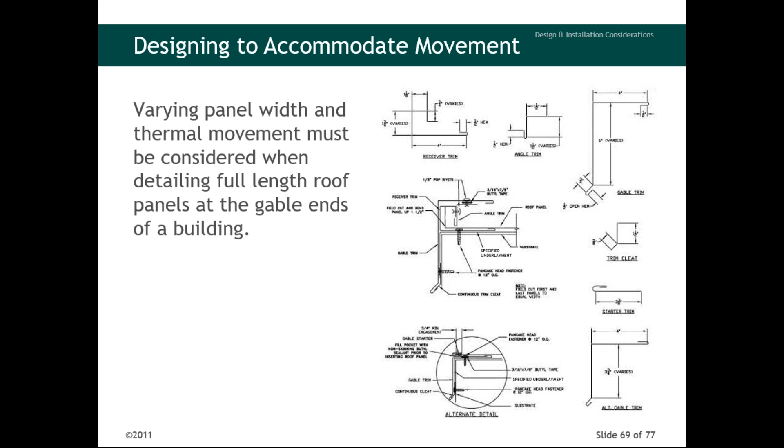This detail also allows for free, unrestricted thermal movement of the panel within that receiver trim. Regarding drag load, panels must be pinned to allow the panel to move freely under thermal load and thermal cycling, while resisting the drag load caused by the weight of the panel, live loads, and snow loads. The intensity of the drag load is a function of slope, length, and other loads involved.

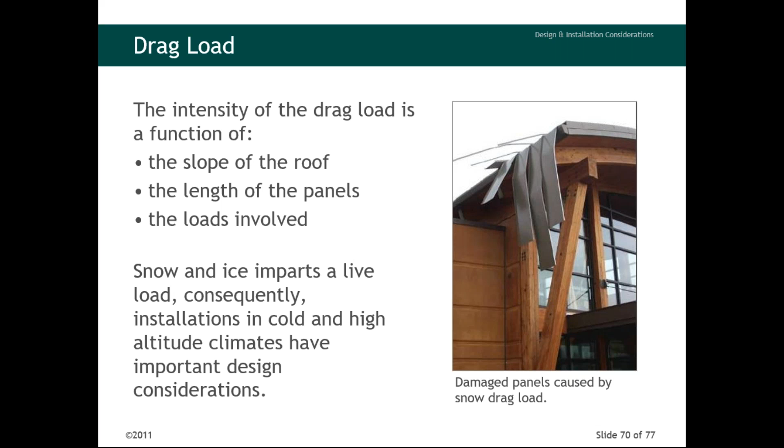Snow and ice impart a live load on metal roofs. Consequently, in installations in cold environments, you have to pay close attention to this. Reach out to me for assistance with that.

Metal roofs are often the choice in cold climates. Take into consideration ice dams and so on. Cold roof systems that keep roof temperature near the same as outside air may be best for preventing ice dam formation, when properly installed and ventilated. But generally speaking, in heavy snowfall areas, you want to design a steep pitch to allow for snow runoff.

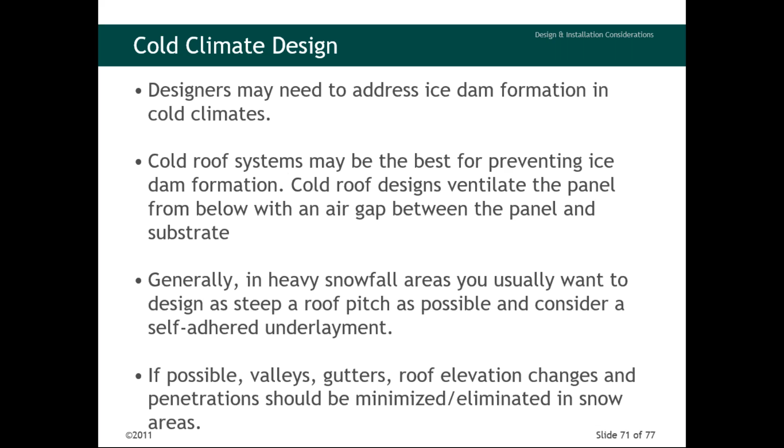Also, self-adhered underlayment is a huge consideration. Ice melt systems can be incorporated to reduce ice dam formation when it's not remedied by design, especially in areas more susceptible to buildup. Reach out to me on that as well - I have a whole bunch of information on that.

Make sure that you engineer the roof for the expected site-specific loads.

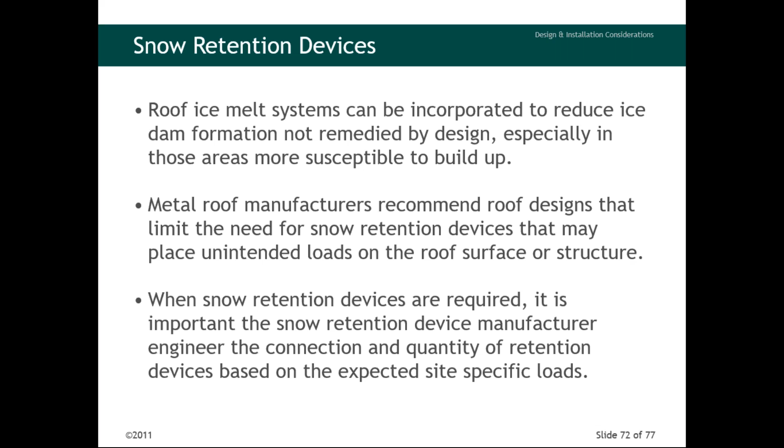So, without mentioning trade names, reach out to me on this. Those same clamps that you can use for PV, you can also use to mount signage, conduit, snow retention, and catwalks.

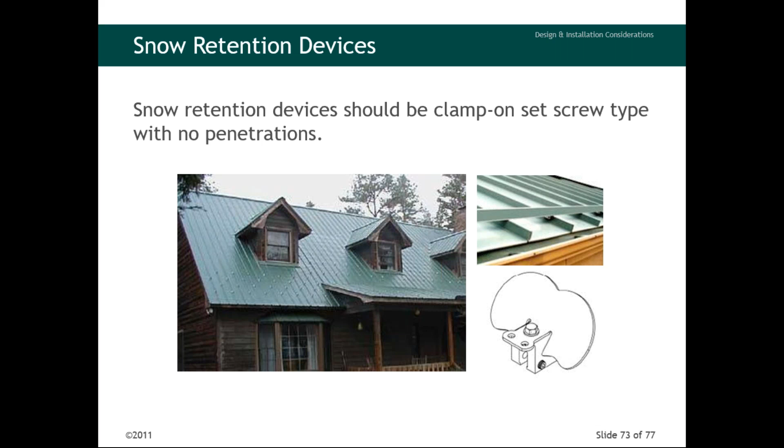Wide valleys: in areas where snow or rain is considerable, make your valley wider.

Okay, pipe boot - I'm going to spend a little bit of time on this because it's often done incorrectly. A pipe boot detail is often used for roof penetrations. Pipes penetrate the roof for various reasons, whether it's ventilation or exhaust from the rooms below. Ideally, pipe penetration should be located in the middle of the roof panel or centered in the pan. When centered in the roof pan, you want the edge of the pipe boot 3 inches from the panel ribs - I say stick a hand next to it, and if it's narrower than your hand, it's too close. Otherwise, it doesn't allow for adequate water flow.

So for this condition, when a pipe lands too close to a rib or on the panel rib, you want to use a cut rib detail. But first, this is one of the only slides I'm actually going to read, okay?

Care should be taken when installing the pipe boot. Follow manufacturer's recommendations. However, keep in mind, the pipe boot is attached to the panel only and not fixed to the roof substrate. If you fix the boot to the substrate, it will also fix the panel and won't allow for thermal movement. So the pipe boot provides waterproofing for the penetration as well as allowing for longitudinal panel movement.

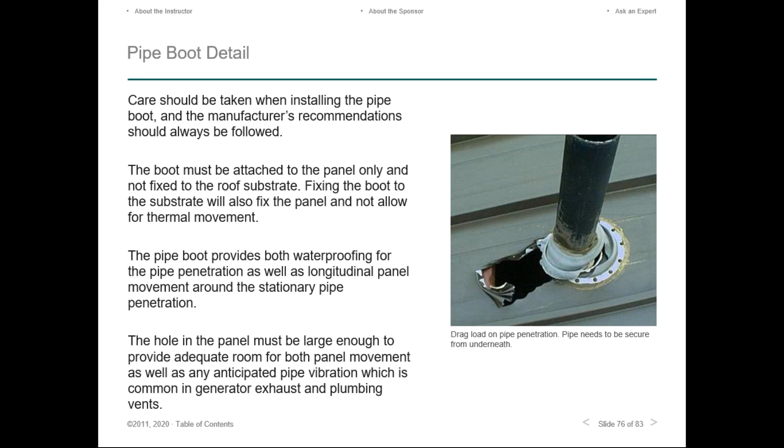So these pipe boots operate in many different capacities for these pipe penetrations. Where it's on or near a seam, a cut rib home plate detail should be used; when it's near a vertical rib, similarly. To help prevent corrosion, the ribs should be cut with a shear, never a blade or a torch - that's also part of installing a roof.

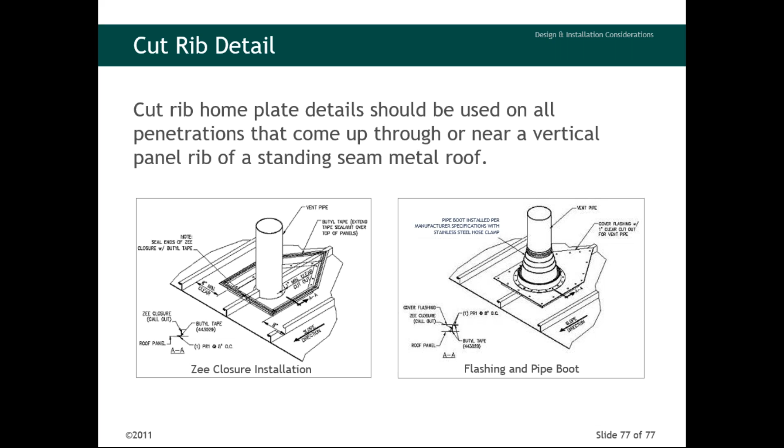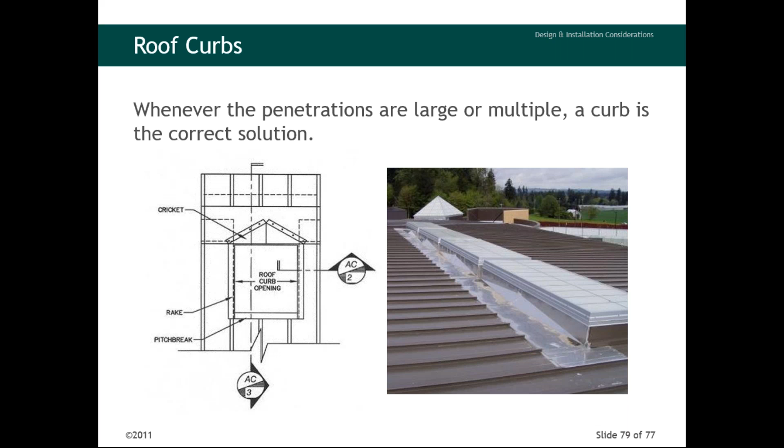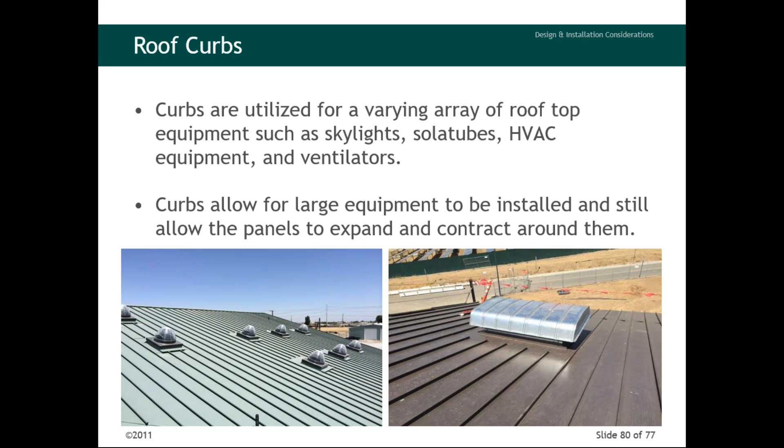Curbs: whenever the penetration is large or multiple, use a curb. If it goes a panel width and a half, you might want to use a curb. If it goes 2 panel widths, use a curb. Curbs are utilized for everything from skylights, solatubes, HVAC, ventilators, anything large you want to put on a curb, put on a curb. It allows for large equipment or collections of equipment, i.e. if you have 4 pipe penetrations side by side, use a curb. It'll allow them to be installed and allow the panels to expand and contract around them.

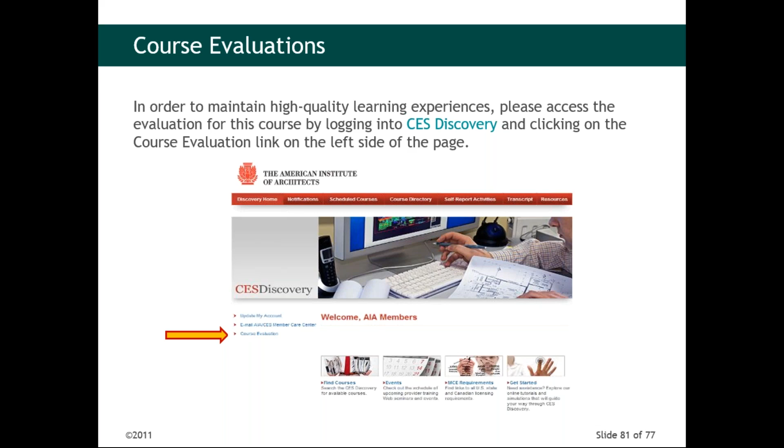And we've reached the end. Are we on time? Oh man, 1 hour dead on almost. Good job, you did great. We have time for a couple of questions, and we've got a bunch of them. Let me hold on a second here. Let me go back, we've got a couple of questions about coatings, but I'm going to come back to those in a second.

When you just mentioned roof curbs, and when you put up accessories like roof curbs and walkway systems and that sort of thing, who's responsible for coordinating the roof system and those accessories and making sure everything works correctly?

I'm going to preface this by answering, because I have a feeling this question is going to come up, about fall protection. I would stay away from any roof mounted fall protection, regardless if a manufacturer of a clamp or clip says it's okay. Any fall protection should be mounted directly to a structural beam or member of that building. Use a pipe penetration with something coming up, with your davit tie off or your D-ring or whatever. Fall protection should not be mounted to the roof, okay?

If the clip can withstand it, that's not saying that the clips that hold the roof down can withstand someone falling off, because a 200-pound adult falling off with a pressure washer off a roof, the forces there are insane. That caveat being said, anything mounted to those clamps, you follow the instructions of the clamp manufacturer. So if the clamp has to be torqued to, say, 200 foot-pounds, it should be torqued to that value exactly. It is not the responsibility of the roofing manufacturer, not just for my company but any company out there. They're going to say you can use these clamps, we've tested with them, but any damage caused by them or any equipment mounted to them is not going to be covered under warranty.